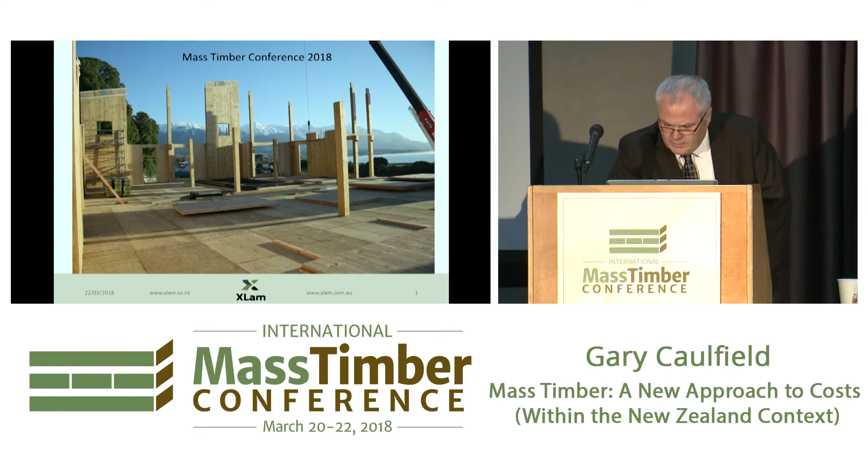Thank you, Gary Caulfield from XLam in Australia. I'm originally from Glasgow, so you could apologise - my English is not my first language.

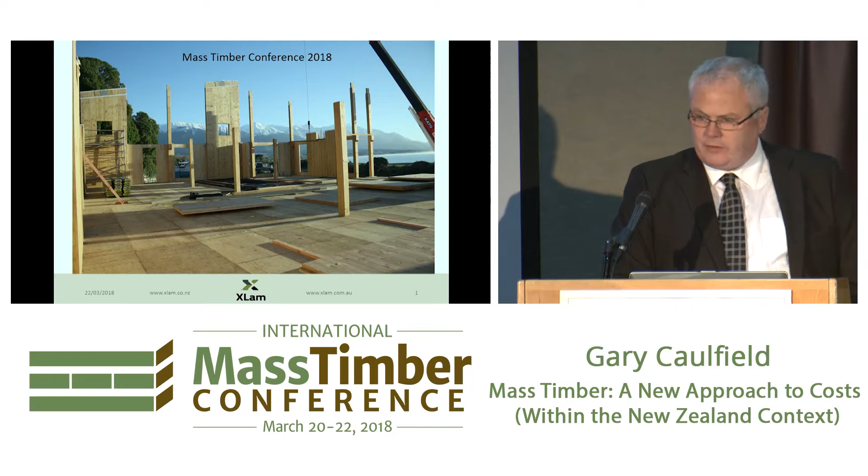Great to hear the speeches from a development point of view, because from a manufacturer point of view, we're the bottom of the food chain. We don't have huge budgets and whatnot, and we're very much at the end of the process.

The title of this was kind of a holistic cost review. It might be retitled Cynical Cost Review from the Day in the Life of a Poor Manufacturer. Being relatively new, we've got lots of new people, structural engineers and CAD guys that sit on big rubber balls and don't use chairs and desks that go up and down.

The office is plastered with sayings. They seem to be going through a phase of Albert Einstein quotes at the moment, and all these quotes obviously bear some reference.

At the moment, to the state of the industry - from what I've heard in the last few days, Australia and New Zealand's in a bad way. Britain's definitely in a real mess. Nick's just moved home at the right time, I think, back to the UK from Singapore. And you guys might be in the same position.

So there's all these new phrases the guys love, but personally I kind of always talk around - what would Albert Einstein say about CLT? And I think he would say that new technology and old thinking provides you with a very expensive new product. And that's what we tend to get quite a lot of the time.

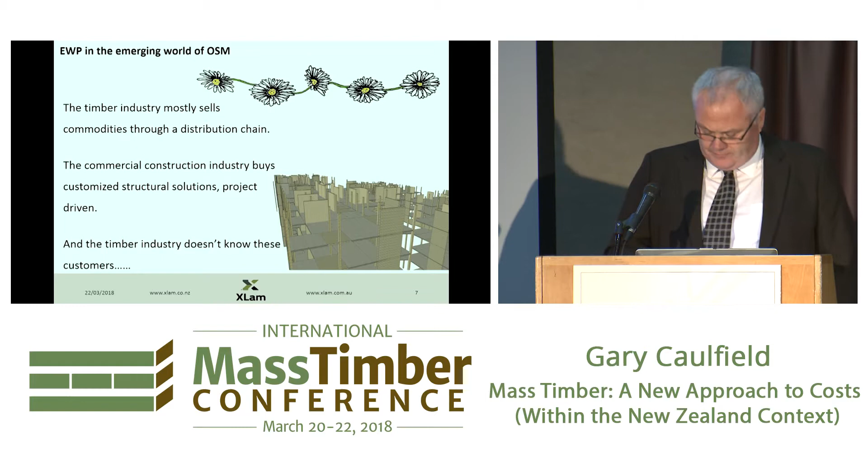A lot of the people coming into the industry in Australia and New Zealand, we find, are from the timber industry, and the timber industry sells in a certain way through a certain distribution chain - it's a commodity. But what we've heard about the last few days is everything's about a project, not about a commodity. And the commercial construction market buys in a certain way. The reality is the timber industry doesn't know these customers, and doesn't know how to sell to them. And the industry kind of looks a bit like this.

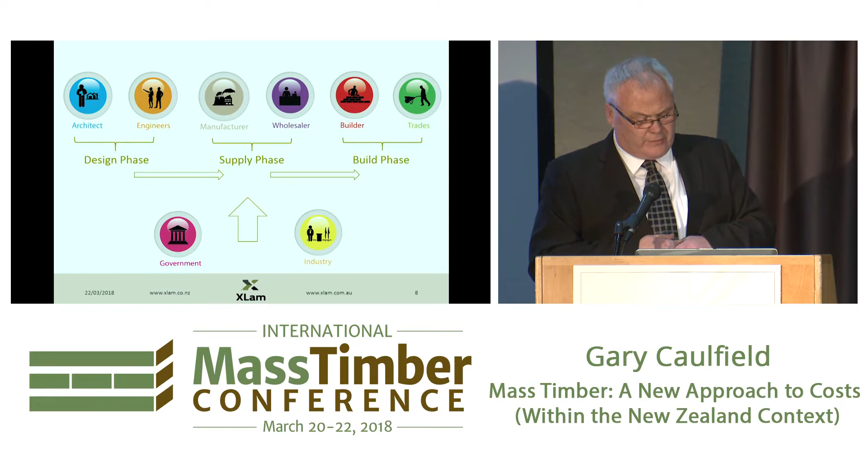In Australia and New Zealand, we've got all these people in a kind of lineal fashion - they don't talk to each other. We tend to get involved quite early on directly with clients, about 75% of the time. That works quite well until the bank insists the project manager's employed, and then none of us are allowed to talk anymore. And the traditional tender model is very old, very antiquated.

We know really well the pros and cons of it, but it's a race to the bottom. It doesn't promote partnership, doesn't promote working together, and what we've heard the last few days is all about collaboration - in a very collaborative, communication-centric model. My wife usually laughs out loud when I talk about communication, she finds it quite ironic.

But when we all get together in the room early on, we've all got the one goal - we're all trying to achieve the best. We want to get rid of waste, we want to maximise what we're doing with the timber, we want to sort out what we're doing with transport, we want to manufacture in the most efficient manner, and we really want to get to a point where our entry cost is the same as the exit cost, so that the developer or the client on site isn't hit with lots of variations.

What's starting to come through in some notable companies - B&K Structures has been talked about a lot the last few days, Lend-Lease, Design Make, as well as Strong Build - is that they're really trying to put everything under one basket. This is slowly coming through in New Zealand, however. I've heard lots of definitions of BIM the last few days, but in our business it usually means that there's bits of information missing.

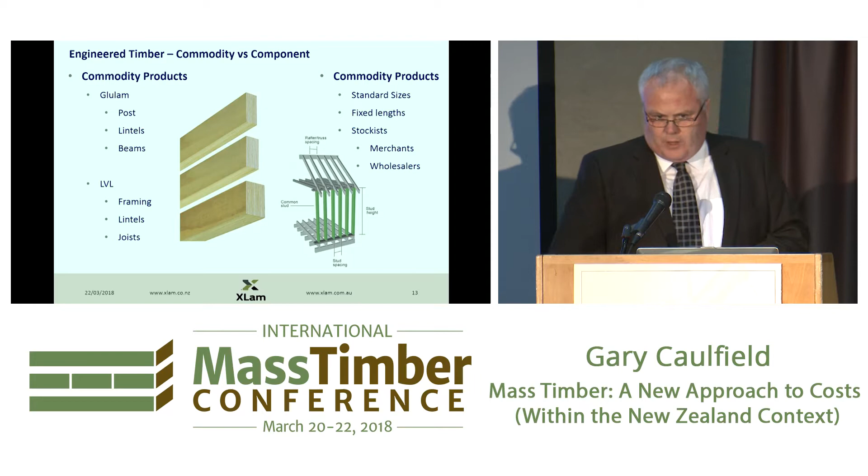One of the big things about CLT and Glulam, we've got a commodity product and we've got components, and there's some big differences between commodities and components. I'll not read them all out, I've got lots and lots of stuff to run through.

The components are made to order, they're project specific - you don't run to Bunnings or Homebase or Mitre 10 and buy these. We've got to make them for you. They're supplied direct. I won't even tell you our definition of DFMA in our office.

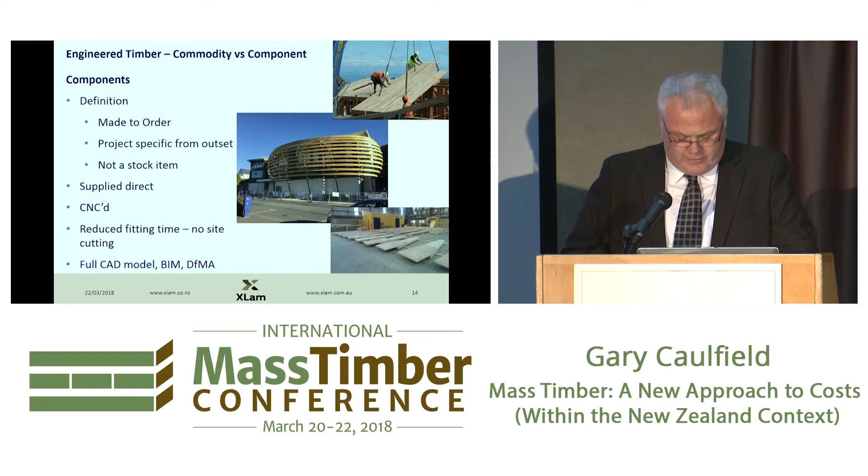What are we trying to provide value for? It's the quality of what we do, that high-speed precision. We invest in CNC machines - we didn't always have a CNC machine. We've got some lightweight materials. It's safe, there's lots of inherent health and safety attributes for the project. It's clean, it's very, very fast, and it helps us out when there's scarcity of on-site labour.

We tend to have to go through a process of, is this project suitable for CLT? Does the layout meet it? What about the fire and acoustic - that plays a big part. We've spent, I don't know how many millions of dollars on acoustic tests and fire tests over the years.

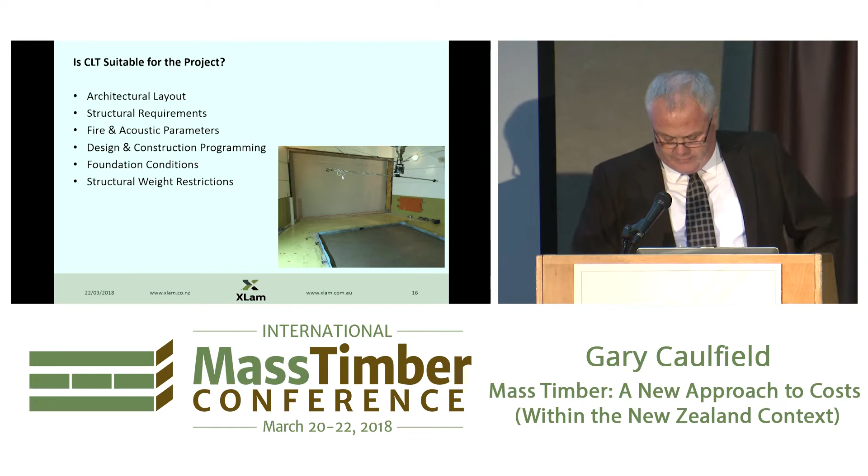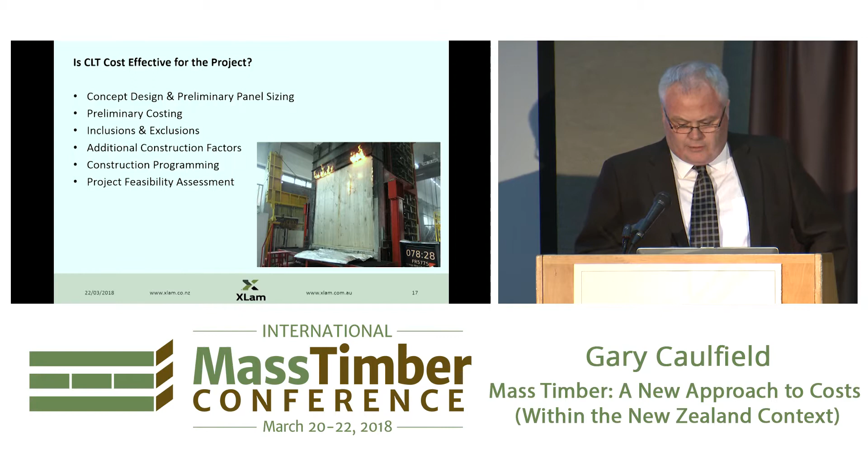So we've got, is the project suitable, but then is the CLT cost effective for it? And we go through these questions all the time, and I spend my time flitting between Australia and New Zealand, but I always kind of enjoy and get a good laugh sitting in the office hearing the sales team when people phone in.

Quite a lot of the first question is how much cheaper is it, and we usually say just hang up, don't speak to that guy. Or the next question is, can I get a square metre rate? And a guy says, well, sorry, is your horse and cart outside? Because the world's moved on from square metre rates. Oh, concrete and steel does this, and we can get away with saying it's the wrong number. And I need a price tomorrow, and we say, oh yeah, we'll phone you right back - and we forget to give them a number.

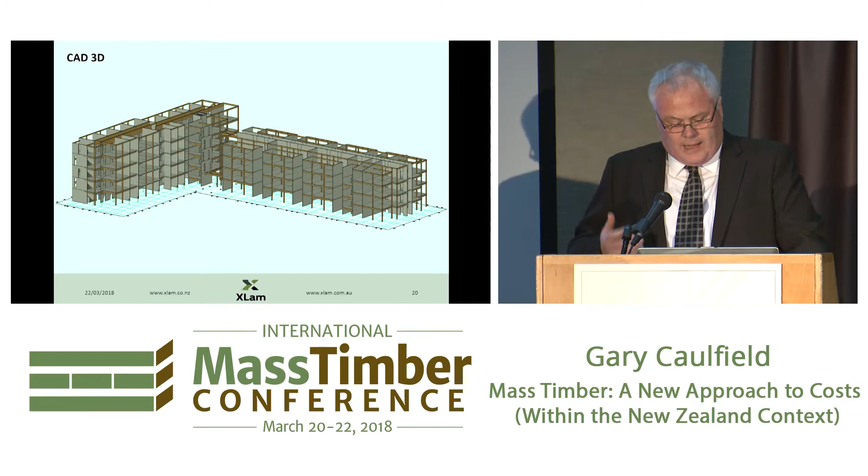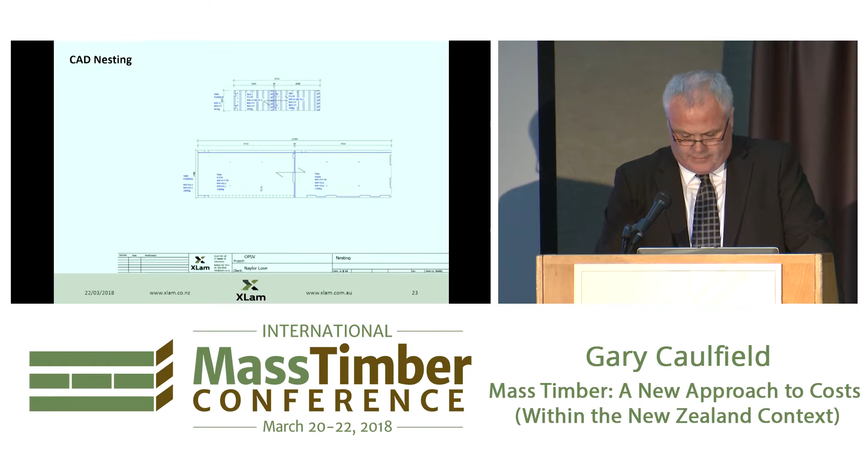What we then try and do is we've got a process to go through ourselves. We've got to do some 3D modelling, we've got to do some 2D modelling and panelise the building. Work out all the panels and the panel shapes and try and get the commonality around it. We've got to try and nest it for how we're going to cut it.

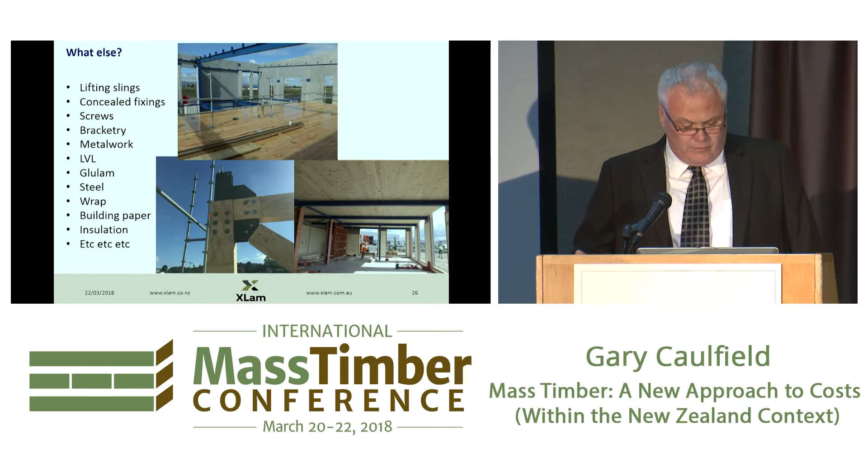We've got to then program the CNC machine to cut it. We've got to figure out how we're going to load it, how we're going to transport it. What else? We've got to think about slings and the fixings. 30% of our business is supplying LVL, Glulam and steel, wrap, building paper, insulation.

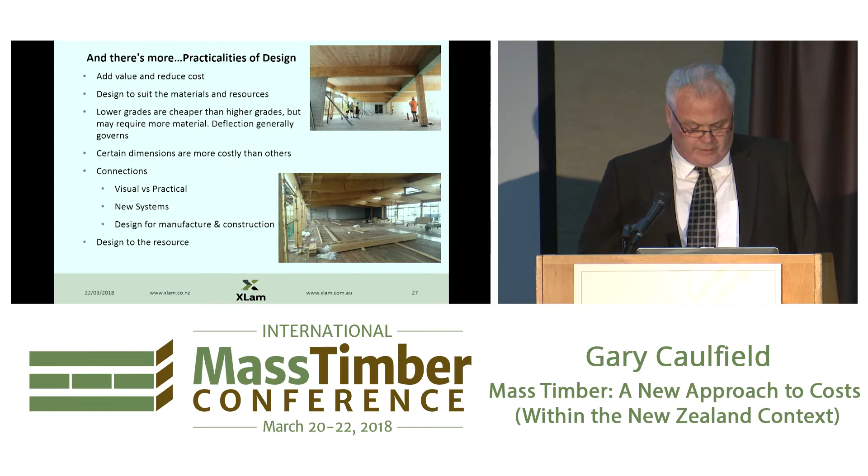Let's not forget, we're there to add value and reduce costs, so we really want to design the materials and the resources to suit the project. There's different grades of timber that we can use, some dimensions are more costly than others. We go into the whole connection conundrum of whether we've got concealed or hidden fixings. And we must get everybody focused on designing to the resource.

And let's not forget, the other kind of elephant in the room - I'm sorry if there's any architects here - but there's always a significant amount of cost added. This is one of our very early projects. The builder that installed this for me hasn't paid for a drink since.

55 panels, every panel different, every panel premium visual - what a nightmare, actually. However, it's for a tech guy, and this is where he sits and thinks.

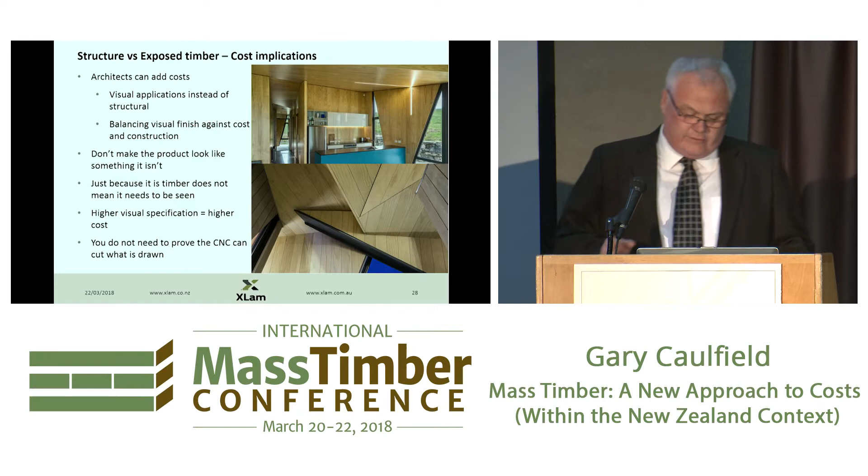So this adds significant cost. It can be achieved, and that's the great challenge architects throw down to us every day. They need to stop proving that the CNC can do anything, because yes, it can do anything, but does it cost money to do it.

So how actually do we cost the buildings? We'll get to some numbers at the very end, but we'll try and keep it light till we get there. We have to do schedules and takeoffs, and spend a lot of time marking up drawings, working out what material we're going to use and how we're going to do it. We're double checking the section sizes, the CAD complexity, the CNC time, and unfortunately every project's different.

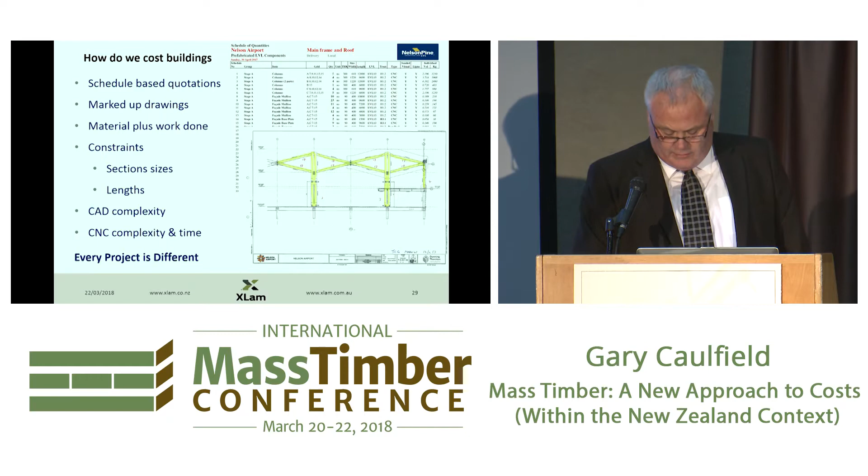We really love getting involved early, and in our experience in Australia and New Zealand, nobody really charges for getting involved early so you can sit round the table as part of the team. It can be disheartening when you're in a room full of consultants who are all getting paid and you're not. I said to one client recently, he should get a discount from his engineer because he's learning - he's training on the job with us.

Really, we're trying to figure out a lot of those key components early. At the end of the day, we just sell press time and machine time - that's all we do. So we really want to lock that in, because once an hour on the CNC machine's sold, we can't sell it to anyone else, and we need to provide that certainty.

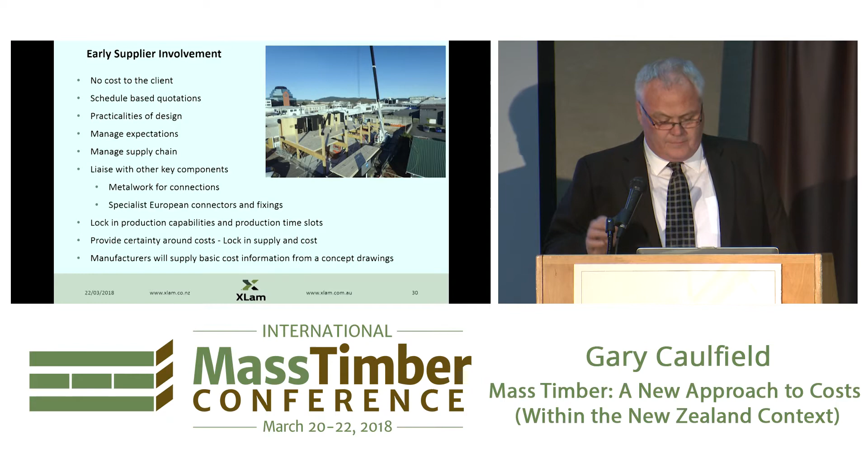We can give you some basic information from concept drawings, but it does take us time to do it. The whole point of what we're trying to achieve - my experience in the last 15 years has been off-site fabrication, off-site solutions. It's been a while since I've been in commercial construction, so I push the prefabrication side of things.

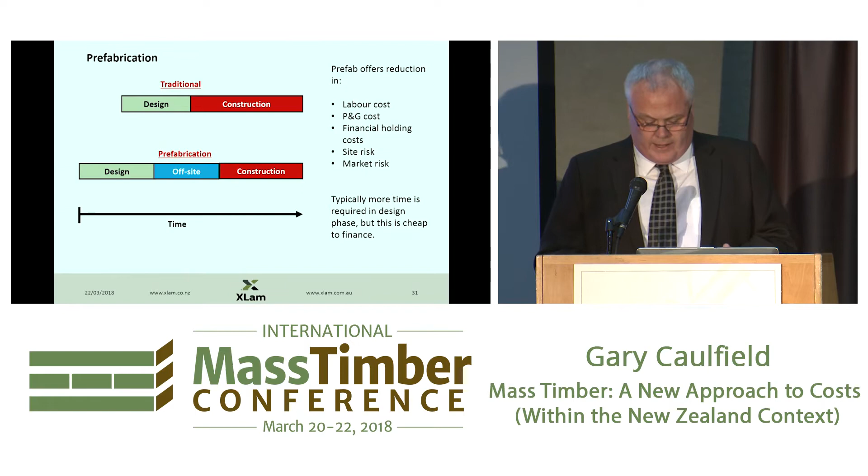And the one thing everybody forgets is you've got to create time to do the off-site manufacturing. So you can only do that when we're all in the same room and we're all quite engaged quite early. I've got a few case studies from projects we've completed to run through.

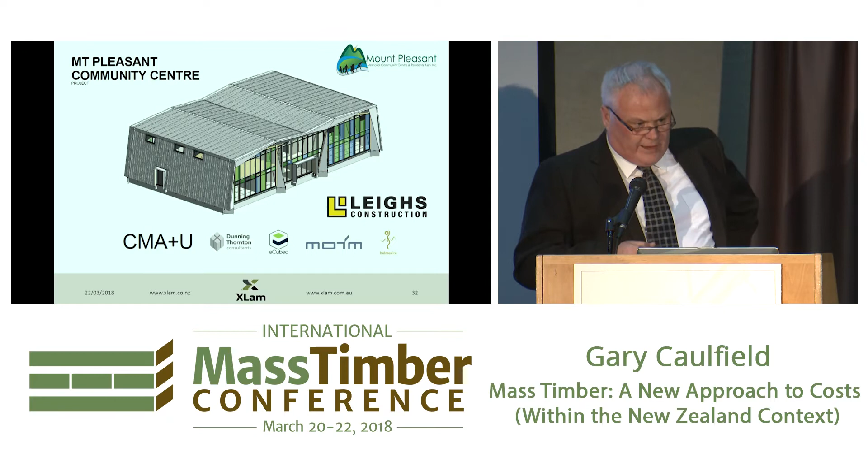John Stolen, if anybody heard his talk earlier, talked about Christchurch and what happened there. Chris Moller, a very famous New Zealand architect, is the presenter of Grand Designs - quite a character, quite unique to work with. He designed this building, and he gets off the plane from Wellington and says, 'Hey, we need to build this roof, Gary.'

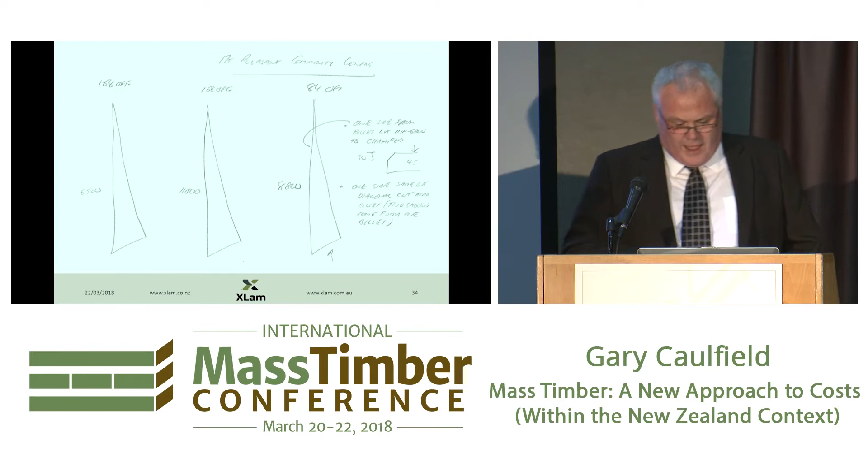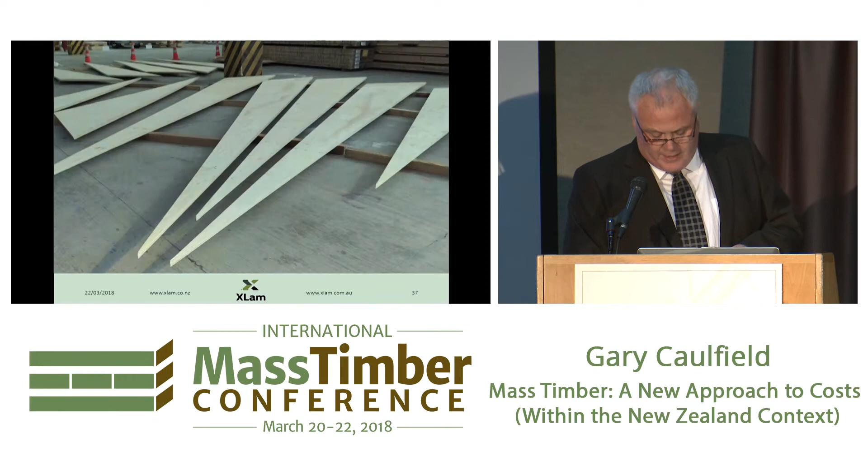He's folded his airline ticket, and borrowed the ones from the two people sitting next to him, folding them and saying, 'Right, this is what we need to do.' You go, 'Oh my God, I'd have rather had a blank bit of paper.' But in the next few hours we've worked out some sizes, done a bit of modelling on the building, then progressed to a small scale model so we could figure out how we're going to build it. We do some test pieces, and here we're into the finished building, which is pretty beautiful.

The point about costs on this one is that it couldn't have been built traditionally. When we stack up this CLT or LVL glulam building against a concrete building - well, the concrete building couldn't be built because the ground out there is absolutely crud. The hybrid was over budget, but the mass timber was under budget. It was finished on time, and at the end of the day the community centre got a building they couldn't otherwise have been able to replace.

Kaikoura District Council building - when I took over at XLam, I believe I stole the job from Nick Milestone, he told me earlier. The board said to me, 'Can you analyse any buildings and see what latent risk we've got in jobs?' So I poured through all the jobs and did some analysis, and I was about to announce that I thought this was the building we had some risk in. This was the week before handover, and then the day before handover, a 7.8 earthquake hit Kaikoura - a very shallow earthquake, just down the road.

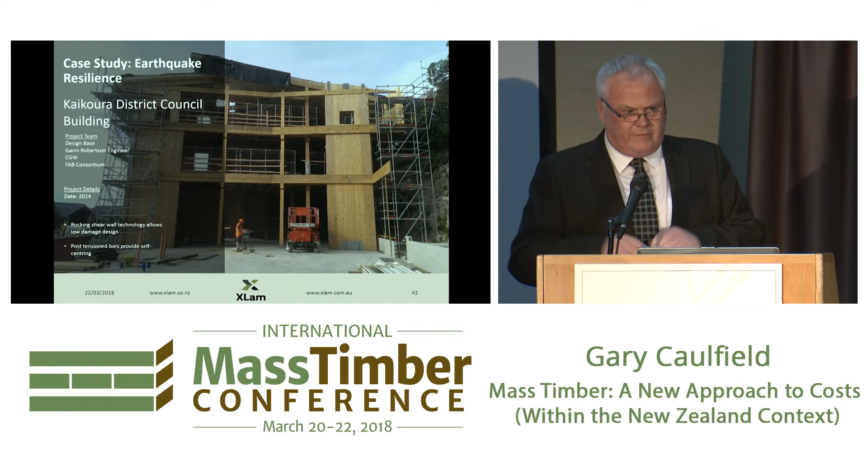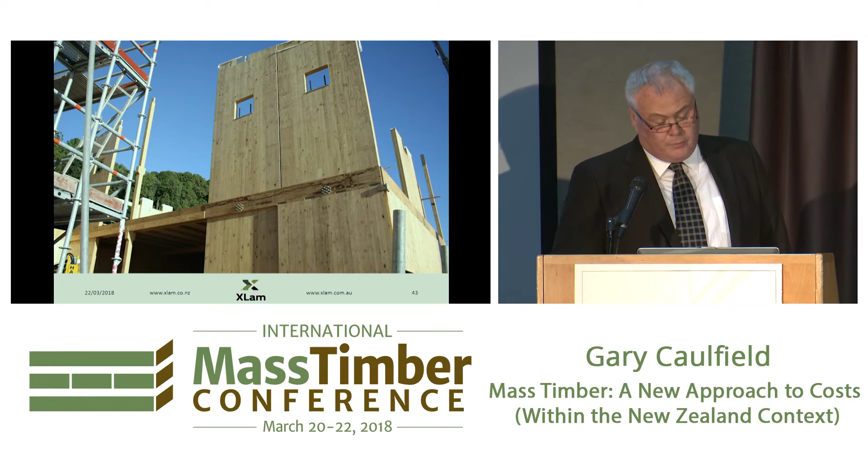This building is a mixture of CLT, some glulam, some LVL, and some post-tension CLT panels as well - that's the outside. It's supposed to look like a cray basket, a lobster basket for catching lobster.

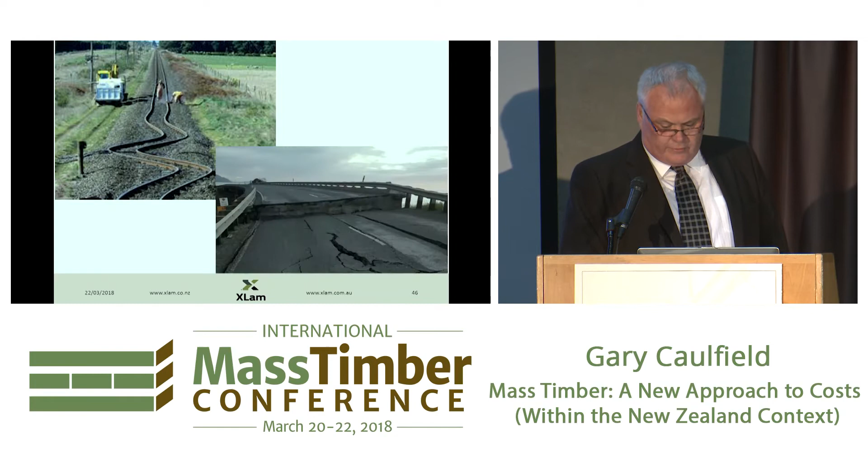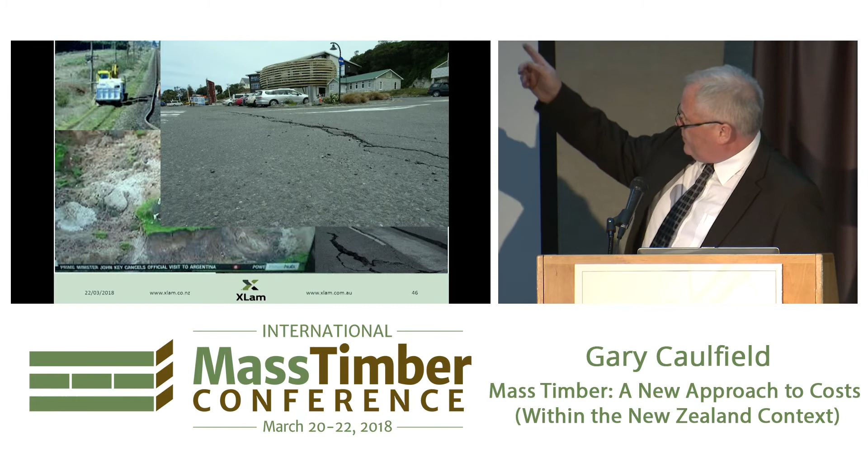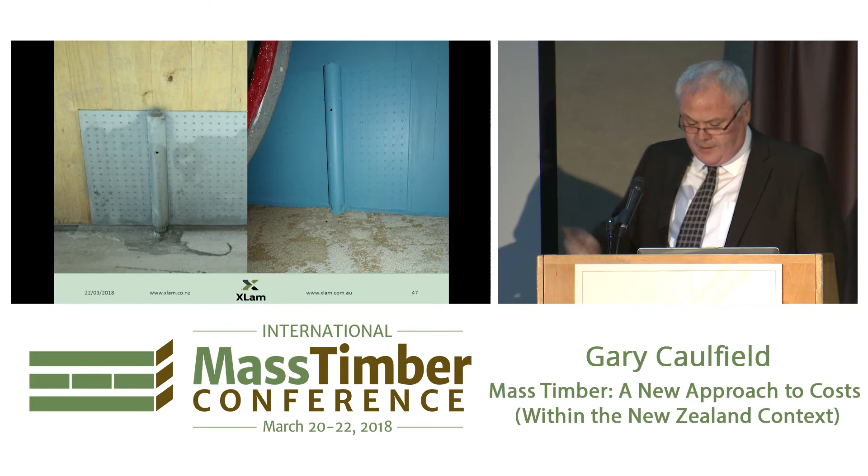Internally, on the left is one of the holding down plates before the quake, and on the right is actually the same plate after the quake. And the paint didn't crack.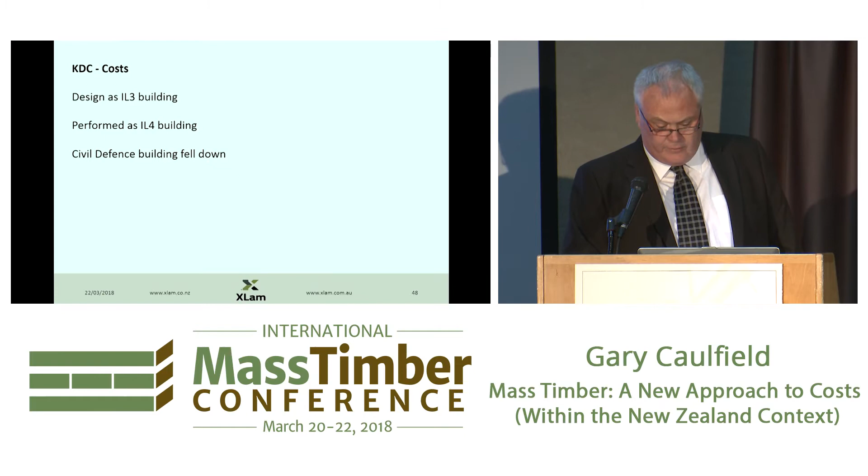In respect of cost, in New Zealand we have importance levels for our buildings. This was designed as an IL3 building, however it performed as an IL4 building, and that was quite fortunate because the civil defence building fell down. The civil defence chaps gave us a thumbs up - they quite liked the CLT building.

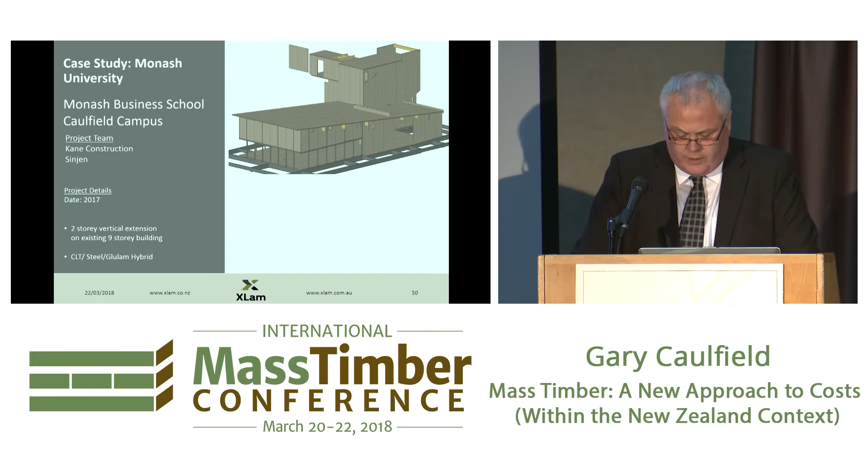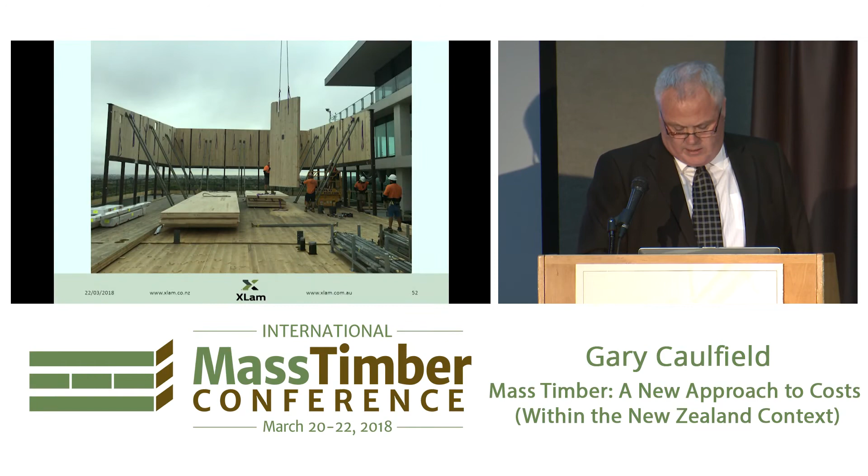Monash University Business School. This is a 3-storey extension on top of a 9-storey building. I quite like the name because it overlooks Caulfield Racecourse. There's a couple of pictures of it, the finished article.

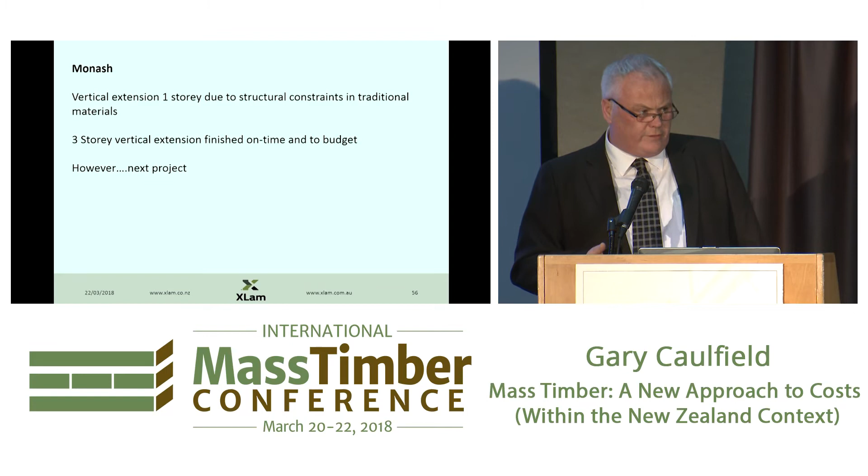However, in respect of costs, when they looked at it, they could only do a 1-storey extension because of the existing structure, not the foundations, but the existing structure. However, in CLT, we got a 3-storey extension. We're a great site team, great designers, it worked really well, worked with the client. However, on the next project, they decided to go out to tender and tender it traditionally to a whole bunch of new people. The main contractor they picked was just a bit too traditional for my liking, so we're not doing the next building.

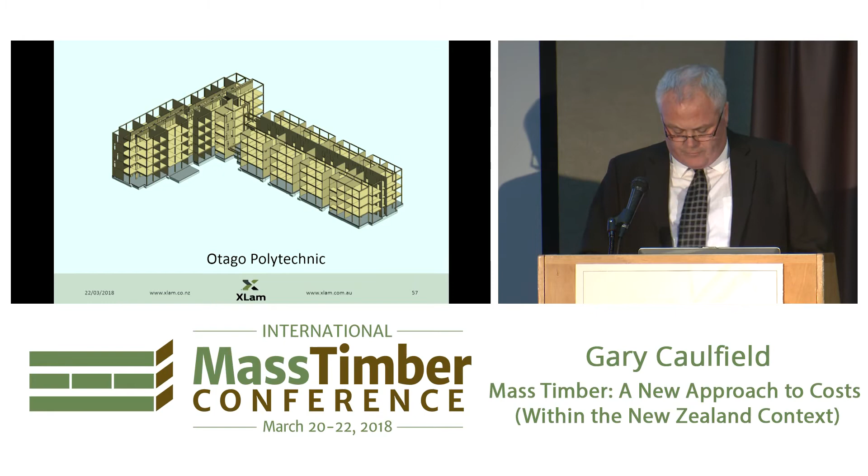Otago Polytechnic, actually, funny enough, I've seen it in a couple of slides earlier today. It's a student accommodation building, 5 and 4 stories on top of concrete. It's now open for the students. A mixture of LVL and CLT, a lot of bracketry.

One of the things that we went through here with the structural engineer, he designed these what we call castellated joints. He was thinking he was going to win every structural engineering award when he worked out how much ductility he could get in the connections here. One connection, and I'm not an engineer, this 500mm connection was the same as 800 screws. Fantastic. However, in my commercial mind, it means it's only worth the same as 800 screws. But these things took 5 hours on the CNC machine, which was $3,500. It was a really dumb solution that he decided not to take our advice on.

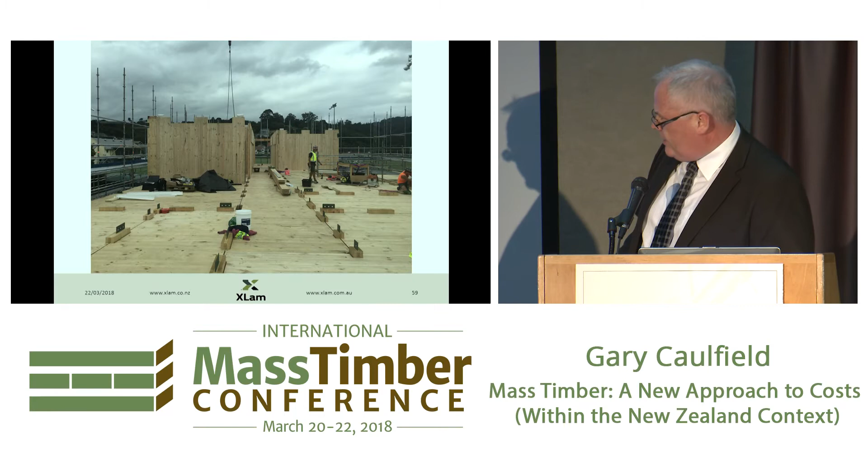A couple of other pictures. This job, we did a price. We had a whole load of items that we suggested to the client he should do. A lot of that advice the client decided was quite foolish and he didn't want to take up. One of the things we decided was that he should mock up all these connection details beforehand, before we actually built the building. He declined, took 3 weeks to install these instead of 1 week that they had allowed per floor. And if we had done the mock-up, we could have ironed out all the tolerance issues that the builder encountered.

These half-lap joints that you can see here, this is a castellated, lovely engineering castellated connection, and the floor slots in and it's got a half-lap joint. We recommended the half-lap joints were 80mm wide. The design team changed it to 160mm, which meant we had to turn the panel over to process it. So it added 6 weeks processing onto our time, which could have been avoided if we'd run with the engineering solution that we had. So I guess I'm trying to say when you're looking at cost versus value and cost of CLT versus cost of other materials, there's some ways to get good wins and some ways to ignore the wins and be foolish.

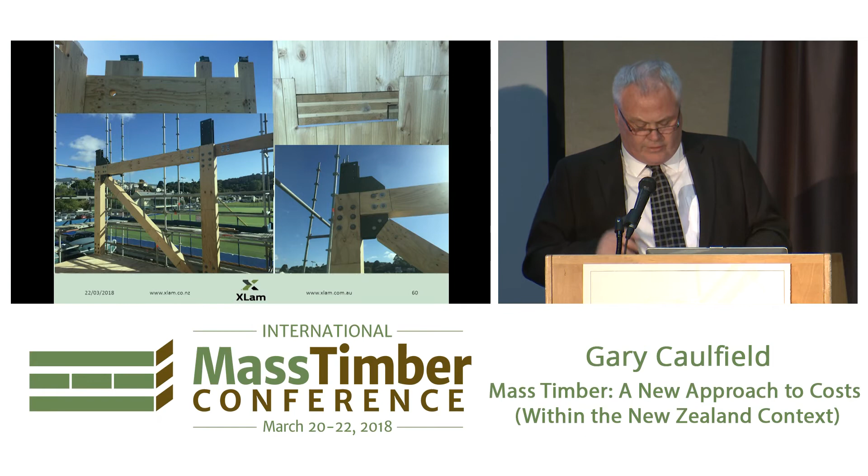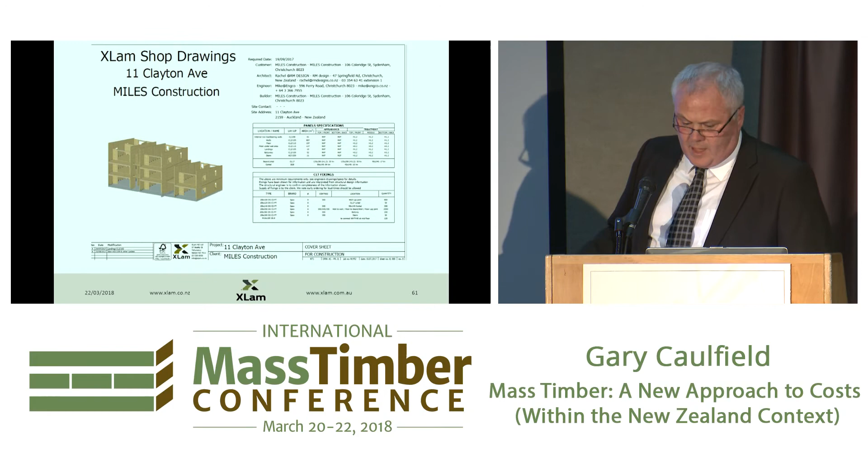We're doing a series of work for Housing New Zealand at the moment. Again, they were mentioned earlier today by John Stolan. We're doing 13 buildings for Housing New Zealand. They're a cookie cutter, so there is just a single module and it's multiplied a number of times depending on the site. Typically what's happening is the old housing stock for Housing New Zealand is 2 houses on a half-acre section. So we're demolishing 2 houses and building a series of apartments. Generally, most of these are single bedroom.

Couple of pictures. But what we've been able to do here from the first job to the last job is extend this wall out here, which means we've deleted that steel post and reduced the thickness of that glulam beam. So we've taken $2,000 out of that floor, and multiply that by our pipeline of 176 apartments with a minimum of 6 apartments. Multiply that out, it's a good saving per floor.

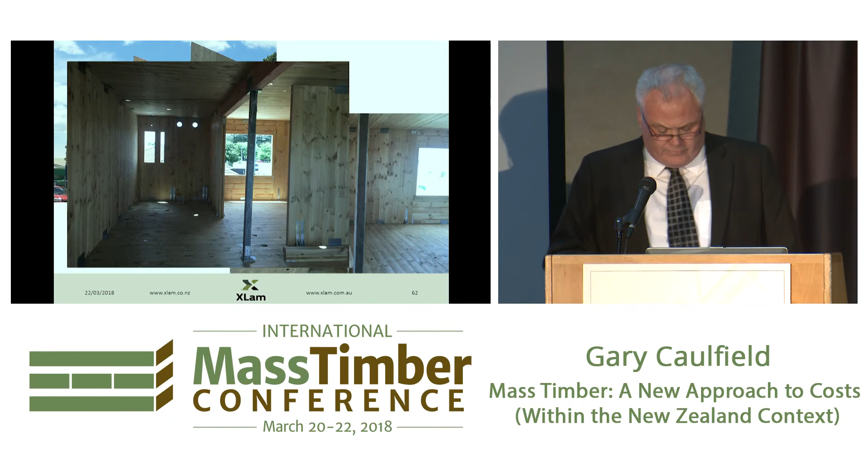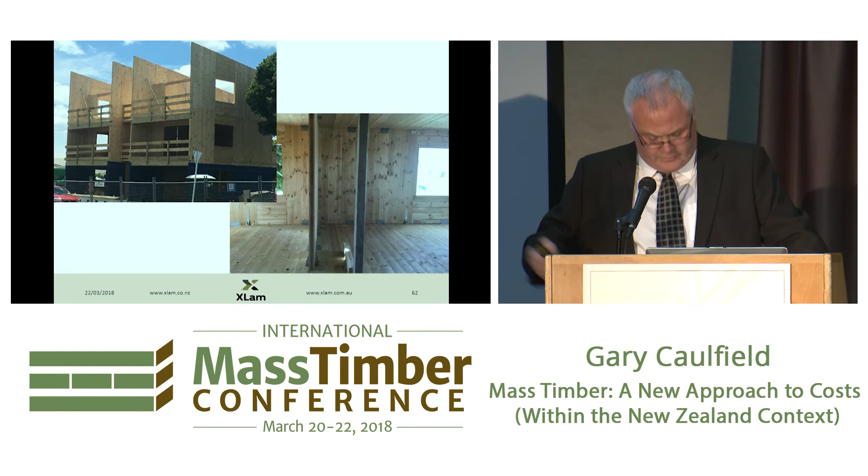So what we did with Housing New Zealand, a government run organisation, never the most intelligent of procurement, we're doing 13 buildings with this cookie cutter approach. Some have got 6 apartments, some have 42. The pilot scheme is 6 buildings, we're on building 5 now, and it was on a fixed price. We've now given them a price for the next 7, taking us to 13, and it's a 19% cost reduction in the original structural price from building 6 to building 13, so they get that extra 19%.

Interestingly enough, their driver was health and safety, on the basis that whenever they embark on a significant building programme, their accident statistics go through the roof.

Building 1, we just did the CLT structure with no roof. Building 3, we included the roof and the wrap. Building 5, we're doing the roof, the wrap, and some pre-finished balconies. And our plan for building 13 is to deliver the building with all the panels completely finished.

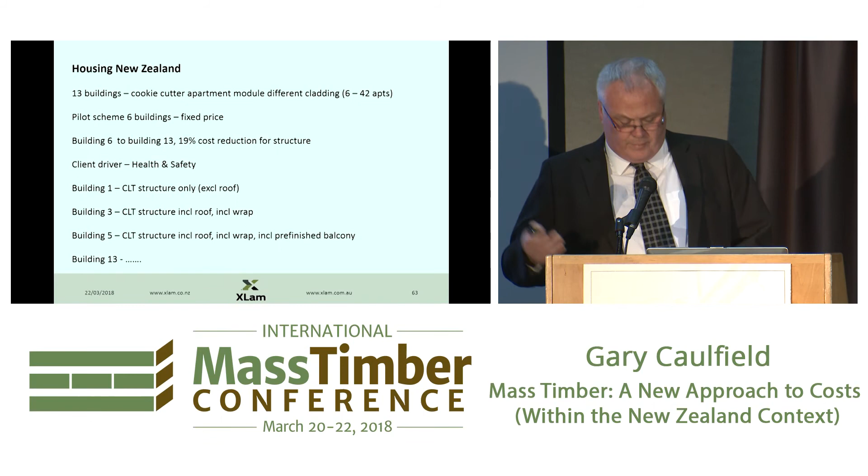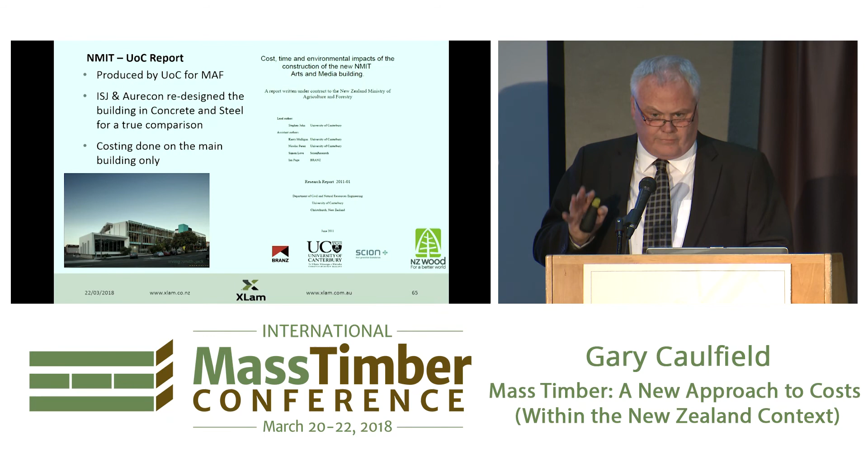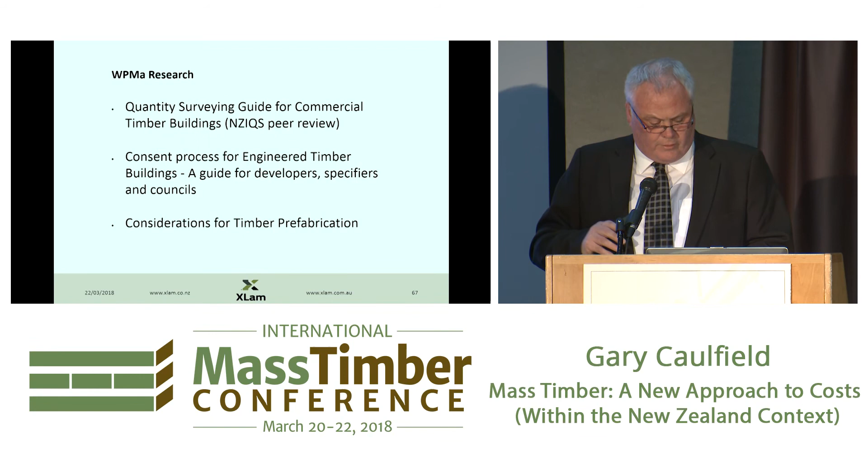There is some good published stuff about costs out there. The NMIT building, actually in Nelson, kicked off the mass timber movement in New Zealand - all that documentation's published, these presentations are available, so have a look at them. The WPMA in New Zealand hasn't got any funding like WoodWorks in Australia, but we've got some cash together and we're doing a timber guide and a quantity surveying guide at the moment. Andrew Dunn runs Wood Solutions in Sydney, and he's run through a whole series of cost plans with a team of experts.

James Fitzpatrick - this is funny, I just put this in. This is James's house, in Castlecrag, Middle Harbour, Sydney, overlooking the harbour. James calls it the Seed House, we call it the Starship Enterprise. It's just about finished - it's been 2 years of pain and turmoil.

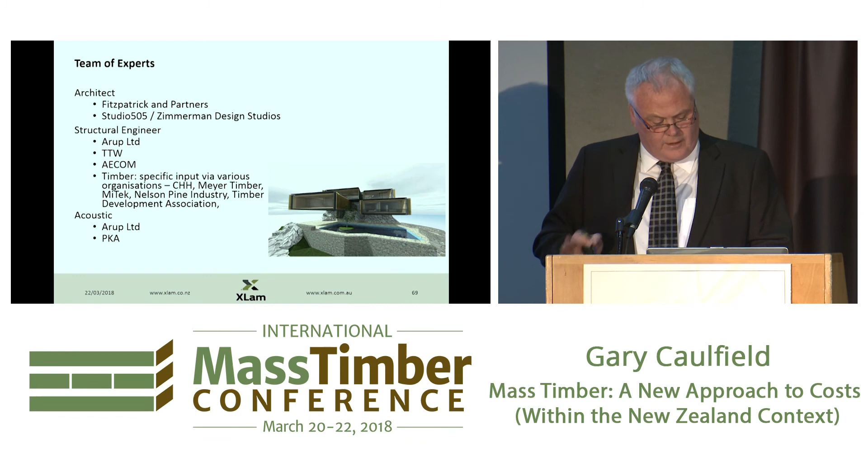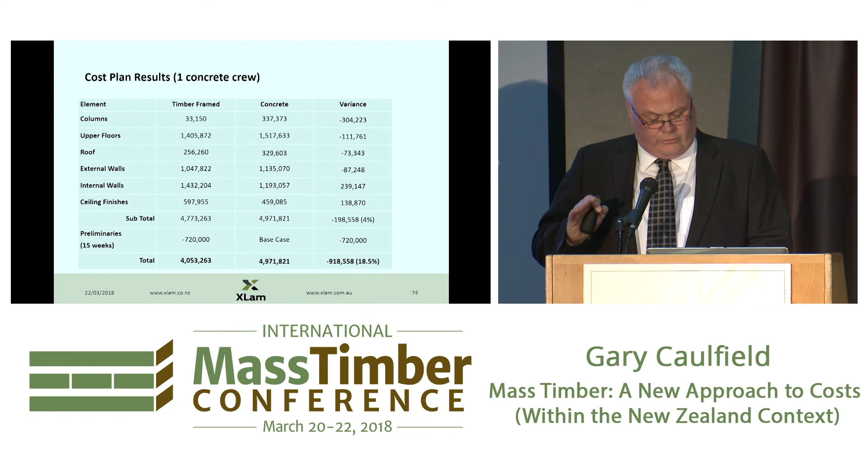But Andrew Dunn pulled together this team of people. They've designed a concrete and a steel building, and gone into a significant amount of detail, showing some good cost comparison. I think you just have to say it was a timber thing written for timber people, so funny enough, timber came out on top. But there is some good data about the crews involved and the timescales, and Andrew's working through a series of them.

Double back to the CLT - us poor supply chain people at the bottom of the pond, you'll find these CLT people, we really need to know what's going on out in the market so we can plan, because there is limited capacity. So you just need to make sure you engage early enough with us all.

Please, if you've got one takeaway, just remember what Albert Einstein said in those unpublished memoirs that have just been found: get the right team together as quick as you can. Steel and concrete thinking is not the same as timber thinking - it's really not. But design it so it could be - I'm not saying it must, just design it so it could be timber from day one.

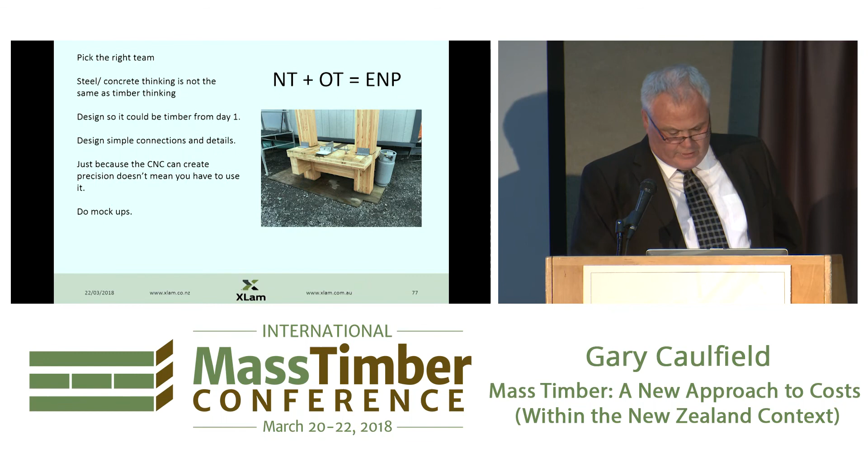Make sure you've got simple connection details. Please don't be the architect that breaks the CNC machine. Do some mock-ups, don't be afraid to work in a close partnership - you'll not be taken advantage of, well, not down in New Zealand anyway.

The cost conundrum - work with everybody, trust everybody from the beginning, and then people can only lose your trust. Exploit any health and safety benefits - we send all our panels out pre-slung to a site, and then we went to visit this guy and discovered he'd had them tested and was using them as harnesses. I go, God, I wish we'd thought of that.